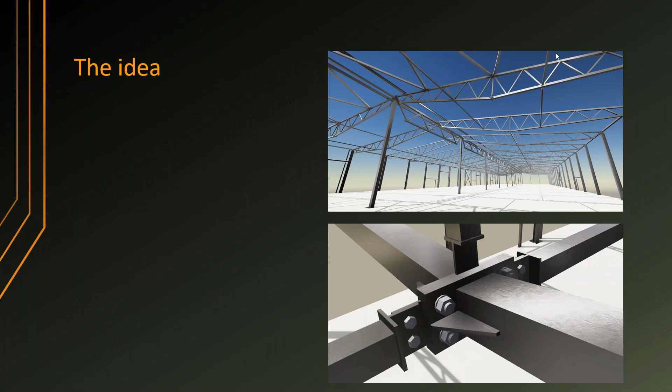Last year, I joined my university. I finished, and now I'm a guest lecturer giving lectures about BIM. And so, today's topic.

Today I'll share some experience we are developing for automated frame building. The idea is pretty simple: to type some building dimensions into a kind of tool, do some optimizations within its limits, and give out a ready 3D model, ready for manufacturing. So this is a simple idea of what we would like to achieve and what we are working for.

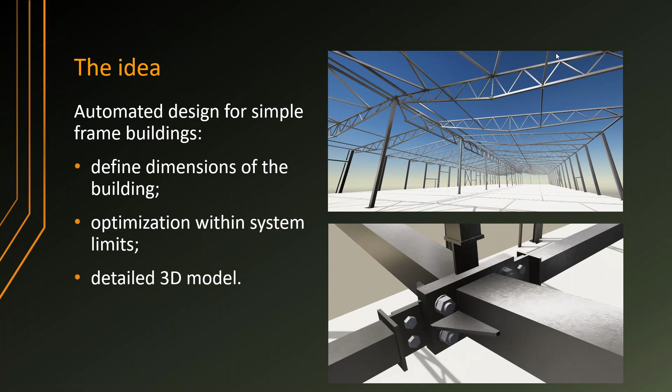In the next couple of slides, I will show some concepts of how we are developing this idea. As long as there is no widely available technology for creating freeform structures like with 3D printers—they are emerging and developing, but at this point they are just a new technology, not so widely adopted in real projects—so we are looking at a traditional way of constructing buildings.

So basically, we choose the structural frame for the building. We do some calculations. We choose profiles and types of connections.

As I mentioned, I worked in an international company, working on different kinds of projects in different countries. At that time, I noticed that each of these countries has its own traditions for how to deal with the structure, how to choose the materials, and so on. For example, in Scandinavia, they're more into prefab structures, and in Southern Europe, they're more into custom site work or brick laying. So there are lots of choices and possibilities to make these buildings.

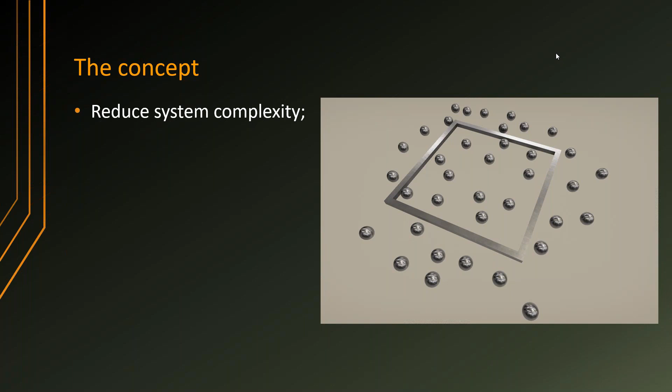So our first approach was to reduce the system complexity, so we would be able to parameterize this building. The next concept we are developing, as we call it, is the main infrastructure for the whole idea. It's a Grasshopper definition.

As you can see, there's an example. With this code, we can create columns, roof trusses, vertical braces, roof braces, internal walls, slabs, and everything else, including foundations. This code is organized by dividing it by its purpose.

You can see the gray line is input data. The orange line is the main code generating the building itself. The blue line is code for generating the 3D model in Tekla Structures, and the purple one is for generating the structural schema or frame for structural calculations.

In such a way, we can easily organize and easily maintain this code. It's like reading from left to right, and we can put other functions in between. It's quite easy, and that's the way we built this up through several trials, and found that this is the best way.

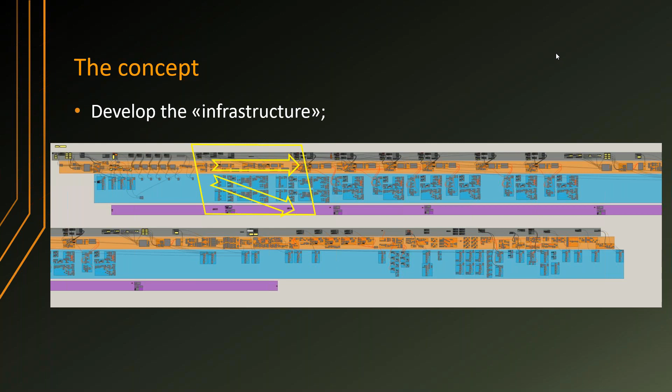The next topic I'd like to mention is the compatibility and sustainability of the code, of the idea itself. As you know, there are so many digital tools and solutions nowadays on the market, and it's difficult to choose one or a couple.

You can never guess if the new tool you choose will still be on the market next year or in a couple of months. My belief is that every time we have a problem and make a decision for one tool or another to solve it, we're actually causing a new problem that should be solved. We're kind of stuck in a never-ending problem-solution loop. So every new tool or solution may create other issues that must also be solved.

Of course, software versions are upgrading, and you must be sure they are compatible with each other. Our approach for this project is to try to use in Grasshopper just built-in code blocks, trying to avoid any third-party code blocks. In that way, we're trying to make it easier to maintain over time.

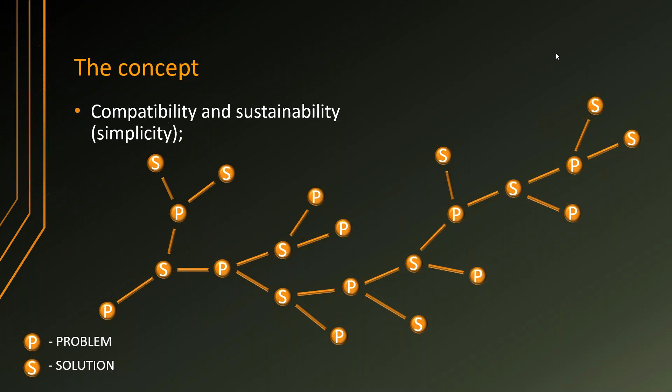Next, about the structural designs - we are looking for the best solutions. At this point we've tested several approaches, and we've come to the conclusion that it should probably be done within Grasshopper, or tested with the RFEM software that we use in everyday work.

This workflow showed that this kind of process does not suit our needs. We're looking for a workflow where structural frames are generated and a calculation engine can process them all and give the best one. With this software combination, we can only generate one by one, and every time we generate a new schema, the previous one gets deleted, so some manual tasks have to be done.

At this point, we're also looking at the possibility of using solutions like Karamba 3D or something similar, which would allow us to test many more variations of the building and find the best one.

There's another issue some of you have probably noticed - structural engineers are basically code oriented, and there needs to be trust built up in the tool they're using. It's not easy to convince them to use a new tool that hasn't already been proven in a real project. So this is another issue we're dealing with - getting structural engineers into these new solutions.

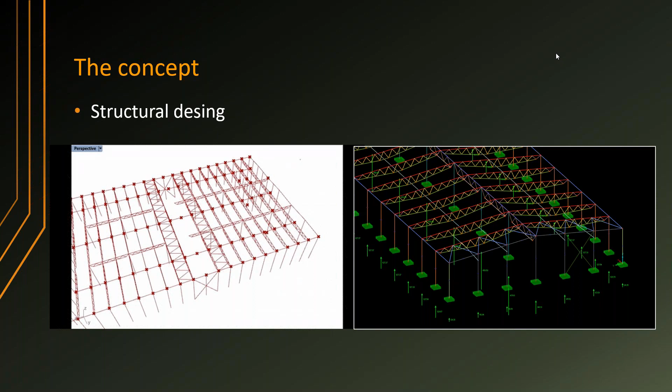The next concept we're dealing with to get this idea done is optimization, which is very closely connected to the structural design itself. The task is to find the best frame with reasonable load distribution and less material usage.

There's a paradox we can talk about here. If we tend to reduce the weight, it means we use the most suitable profile for the specific load. Basically, in that way we are increasing the complexity of the building system - there will be many different profiles and joints to save material.

The question is, do we save something at the end? I'm not quite sure at this point, because the producer will have to buy all these different profiles. There probably will be some leftovers in stock, so the prices will go up. The same goes for a builder. They will have to deal with a higher variety of structures and solutions, so it will take more time to assemble, which could also increase the price.

There's another approach: if you try to group all these profiles, we'll have less variation, fewer different profiles, but at the same time we will increase the material amounts.

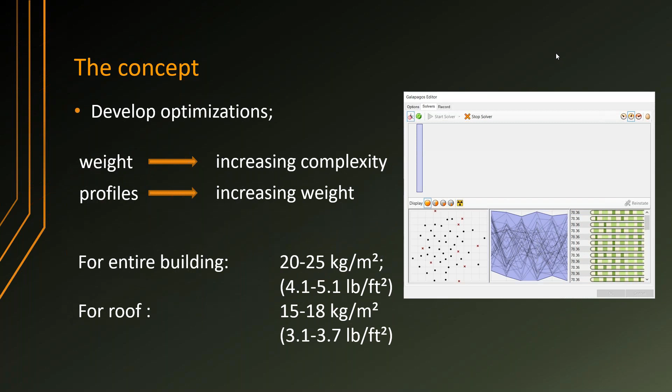The next part is about the 3D model itself. Basically, once we have all these frames ready, calculated and optimized, we need to make this 3D model. Grasshopper code allows us to connect to many other software packages to create this 3D model — it could be ArchiCAD, Revit, Tekla Structures, or Rhino itself. There are probably many others, of course, but at our company we decided on Tekla.

We've been working with this software for a while, and in our view it's quite suitable for high-level detailing. You can see examples made in Tekla, but there's no big problem connecting to other software. Solutions are available, and with higher usage of IFC file formats, it's probably even possible to do this directly in IFC.

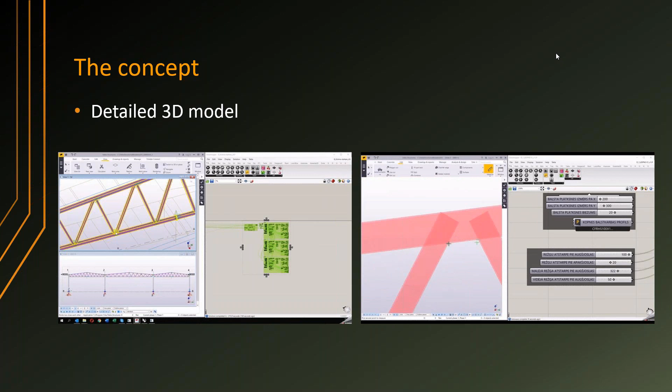That's the modeling code. As I showed before, this blue part looks quite big, but it's actually relatively easy to set up compared to the main code, because we've already got all the lines, geometry, profiles and so on. So we just have to connect to this modeling software and realize what's already done by the basic code.

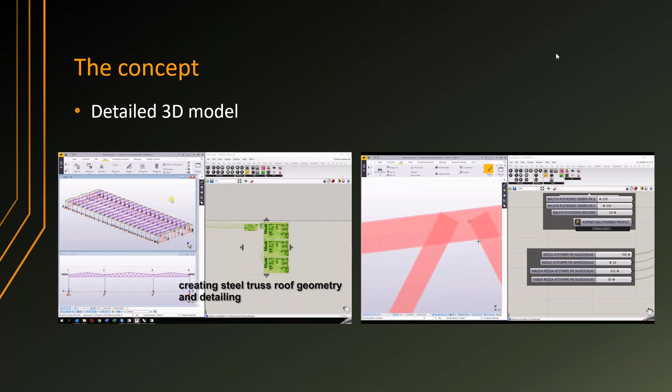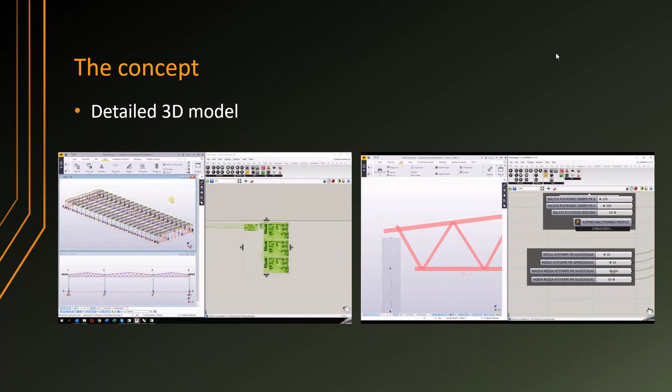The benefit of this is we can relatively quickly get all the materials and make decisions for the next stage of the project. We can easily change everything and see the results again.

So these were the main concepts. First, we reduce the complexity of the system to be able to parameterize it. We keep in mind the possibility of increasing complexity over time, adding other solutions, materials and so on. But we start with just a simple one, and the structural design should be able to do calculations for all possible variations based on the Grasshopper-generated frames.

The code itself should be readable and easy to maintain over time. It should be as open as possible for users to adjust it for specific project needs. As long as there's no widely available technology for creating freeform structures, optimization must include many more factors, such as available profiles, materials, manufacturing and construction technologies, and so on.

And at last we need to think about this 3D model — what format is needed, how do we create it, and where will it be used. So these are the concepts we are working on to get our idea done, and there are some examples.

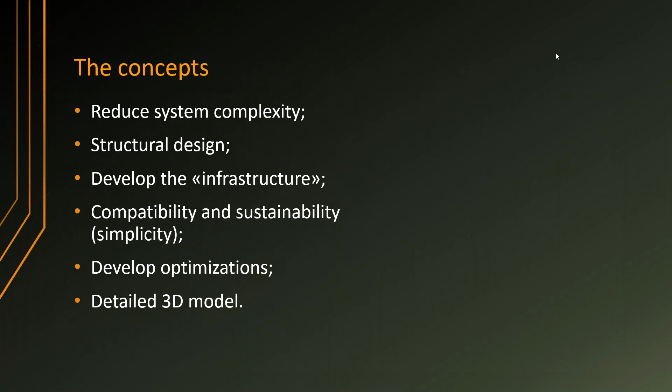It takes some time to generate all the geometry. It's pretty complex, but this code helped us to reach the limits of the software, and that was one of the tasks we wanted to achieve.

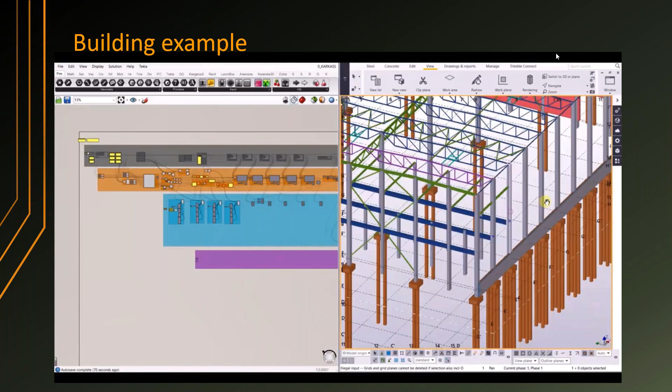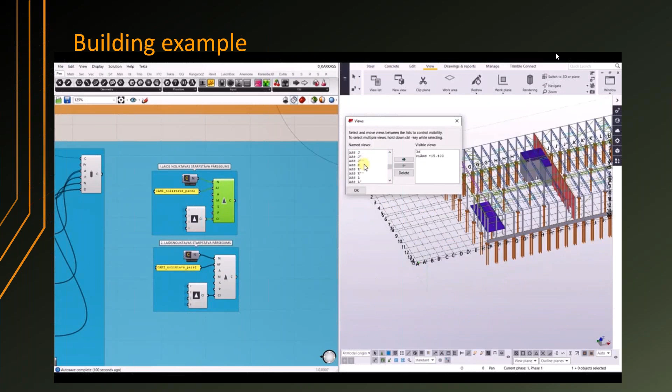But doing such big code in the project, this was a real project, we found issues with the live link. At some stage it broke down, so every session we knew we had to delete all the building and regenerate from the code again.

It's improved by Tekla now, and there's no issue anymore. You could see in the video in some place there were these blue slabs generated manually, so this was basically another issue we faced.

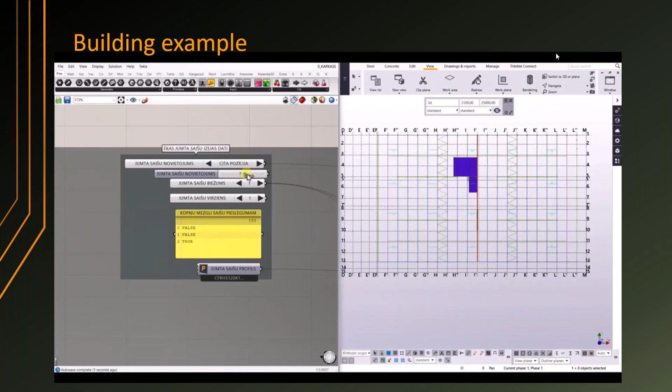Normally users in Tekla use components one by one, but using this code we were able to run all of them at the same time. We found that Tekla was not able to deal with them all at once, so those components should be executed one by one to make sure they're correctly displayed in the model. This was also improved.

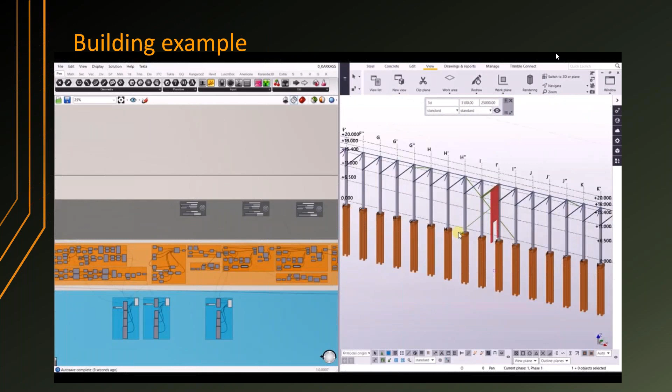So this was a great experience, and we can move forward. There is much more flexibility to the system now, and we can achieve more.

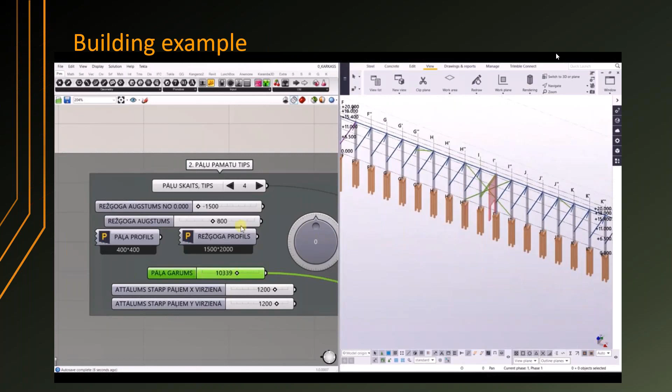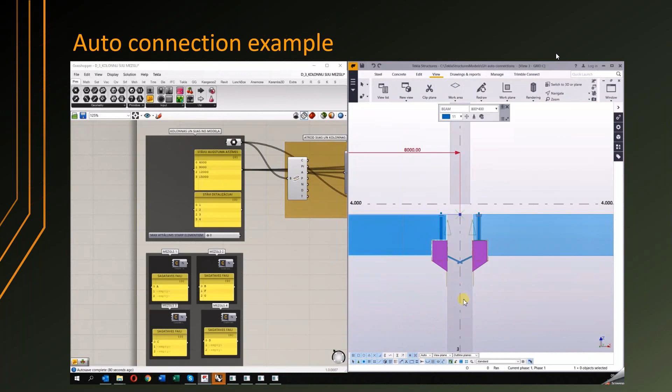Of course, there were also some Grasshopper improvements we could do with this project, and here is another example: auto connections we have developed. Basically, the code finds which elements in the model are connected, and it can divide them by the floors. In this case we have removed these connection points.

We can set up in the code the distance that will be taken into account. As you can see here, the points are connected, so a joint is generated. And if we say the allowable distance between elements is 300, the connection is also generated there. So it's quite a useful solution to automate all the joints between the structural elements.

And it's very good for prefab structures.

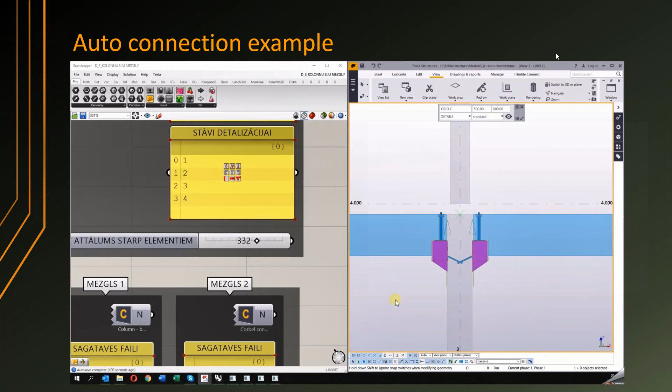That's all from my side at the moment. Thank you for your time, and I hope you got some new insights and my experience was useful. Thank you.

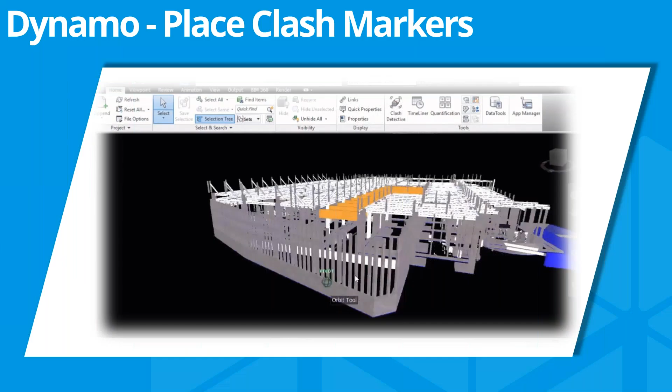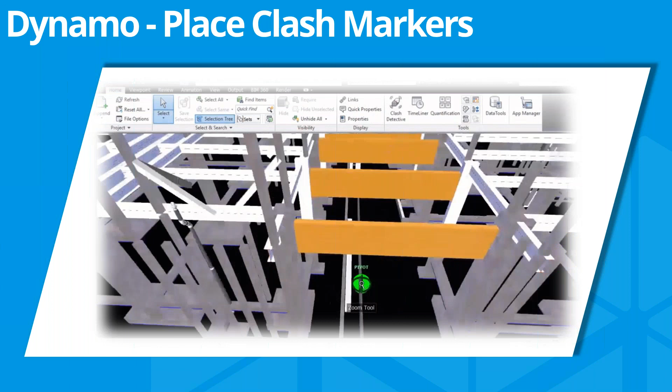We all know the clash coordination workflow where you do a clash inside Navisworks and then export that out to Revit via Dynamo and Excel. It's a pretty common workflow, so I'm not going to dig into it here, since a lot of other people have documented it. But just some highlights: we're going from Revit to Navisworks back to Revit, we got the XML report, the Excel file is necessary, and the biggest thing about this workflow is really lining up your coordinate systems correctly. But we're going to avoid that.

Let's look first at the Navisworks views. I believe view templates can be your best asset in a project. So the first thing we can do is set up all of these Navisworks views if we have appropriate view templates, all set up with a little bit of Dynamo code.

All we're doing here is getting all the views, then removing the null values - this is like 3D views that come in as null. We're then getting the ones that are templates, and looking for the ones that say Navisworks on it. Since it's a 3D view, we'll make a view for each Navisworks view template, and these templates could be different system types or however your office sets it up.

We can also export all these views once they're created to Navisworks files pretty quickly, thanks to Data-Shapes - we'll be using his work a lot in this workflow. Relatively easy: get your Navisworks views, give it a file path, get the current document, and make a file name from the document, actually adding the current date to it, so you always know which one's the newest export.

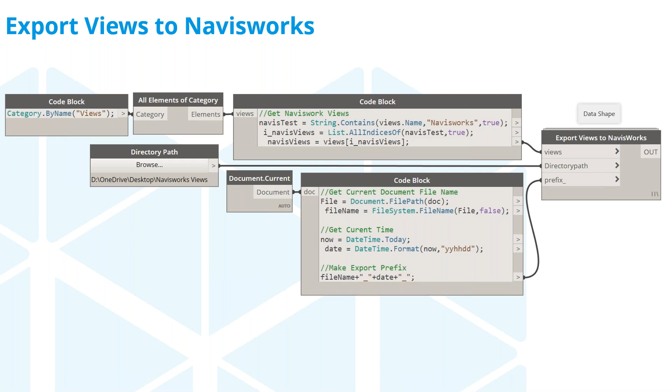I thought it'd be fun to look at another way of doing clashes - this is actually doing clash detection inside of Revit with Dynamo. Oh well, sorry, this one's actually the workflow for going from Excel.

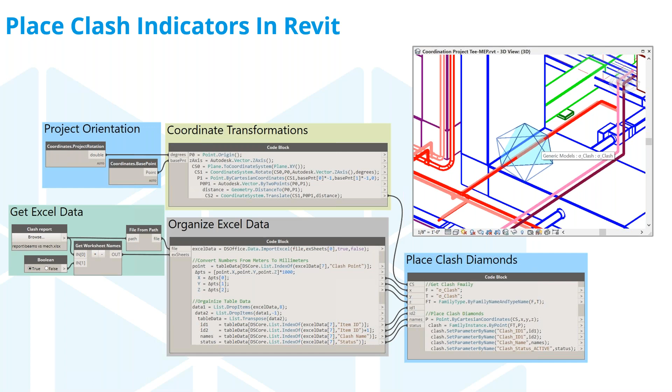You can see we have Excel data coming in, and we're then organizing that Excel data. On the top you can see we're pulling coordinates from our project, then translating the coordinate system, and we're able to place our clashes and set the parameters. But here I want to look at a workflow where we could do this all straight out of Dynamo.

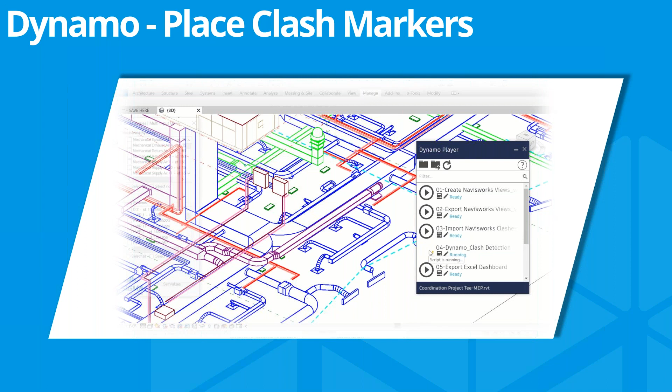This is really awesome if you don't have a huge model, but it works actually on the active view, so you can limit it down. Let's say you just modeled an area and you want to know if there's clashes - you could run this really quick, a lot faster than having to go all the way into Navisworks, set up your views, and do the Navis export out. So it's a much faster way.

What we're doing here is actually grabbing the Revit elements - so the elements are our clash family. And then also... oh yeah, we grab all the systems from the active view. So with the systems, we're then able to have that UI pop up so we can select certain systems. I found that's a really good way to get just the Revit elements that you're looking for.

We then use a node out of MEPover's package - he has ones where you can get all the elements from a system. We then need to filter these elements a little bit, but then the real magic of the script is a node inside Bimorph, which lets you do clash detection really, really fast compared to doing intersections in the native Revit way.

Now what's really interesting about this, I think, is how much data you can start collecting once you've done the clashes. So I really wanted to see how much data I could collect just from the information I had, and then what I could do with that information.

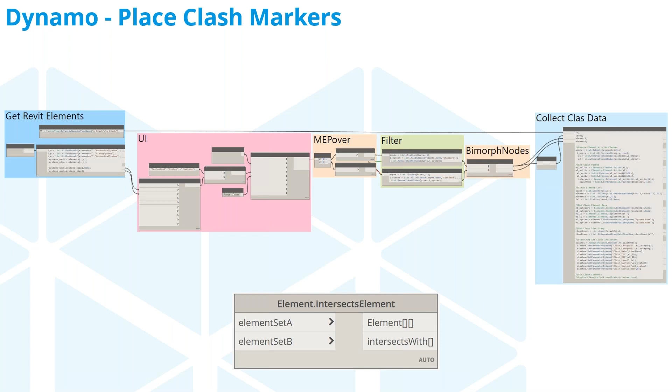So here's just some examples. Of course we can get the element of the clashes, the two elements, and the system types of the two elements of the clashes. But we can also, from the points, start to hone in on stuff like the level that this clash belongs to, the scope box that this clash belongs to. And then we can even think a little bit more outside the box about maybe the volume, so we can look at how big the intersection is of the clash and start to limit down which ones are bigger issues or which ones are just barely nicking, maybe because of some insulation, and it's not a big deal.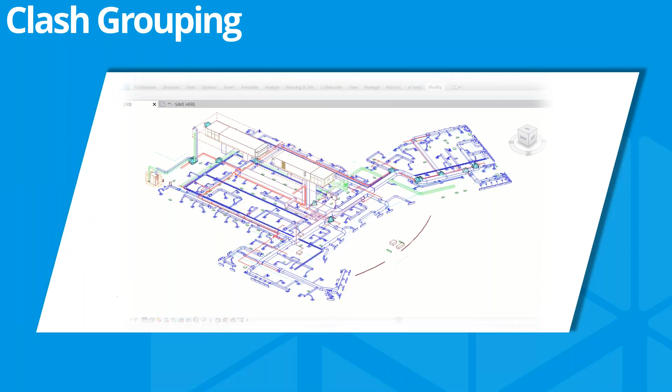Then also, how can we start grouping and ranking all these clashes is a really interesting thing. So clash grouping - this is our model. If we strip it all away, you can see that. But then, how can we start to group these clashes to be able to organize and go through it in a thoughtful kind of manner?

So there's a couple different ways to do it. One of them is a fun thing that I've used quite often since learning it, and that is k-means clustering. This is just a fun example of k-means where we're using a VAV box to cluster these groups of air terminals. You can kind of see how the VAV boxes move through multiple iterations to find these clusters. So you can think about using k-means to find massive groups of clashes inside your project.

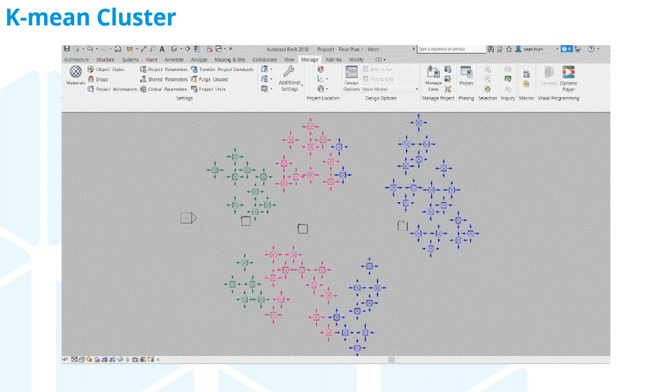Another method we've used is just grouping stuff by distance. There's a nice little Python node in there where we can look at the distance between the clash indicators, or spheres, or whatever object you use. And then you can put a margin on there. So if it's less than 5, in this case, you can see that all 3 of those blocks are grouped together. If it's greater than 5, you can see that they're not grouped together. But this could be run on all the clashes, and you could start to very quickly group clashes that even overlap each other to get a better understanding of where there's a lot of clashes and how to attack the problem.

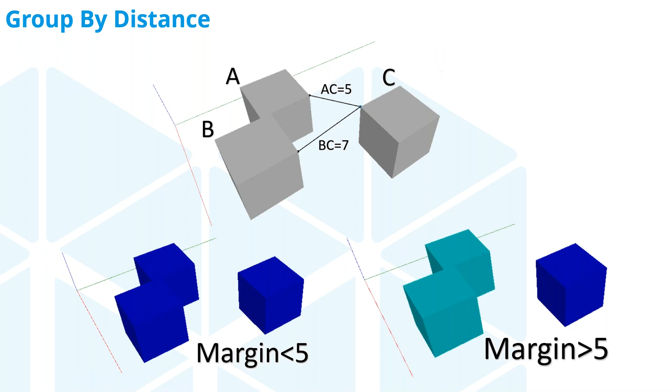So this is something that we've built. You could run all this out of Dynamo Player to even set different groupings. So here we have the option of setting groupings by scope box, setting groupings by using k-means, and even setting groupings using the group and the grids I put on there as well.

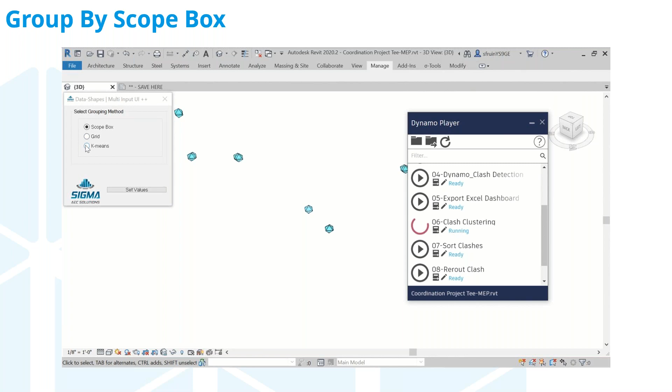So now we have all this data, right? I thought it'd be really interesting to get it all into Excel and see what we could do. So maybe you could have graphs of clashes solved versus new clashes created over time, to see if you're actually causing more problems than you're solving.

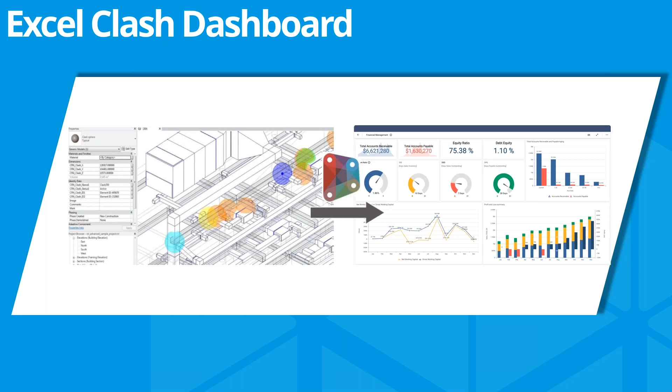I've also thought about maybe gamifying clash detection, where every time a clash is resolved, the Dynamo script is able to collect the person's name that solved that clash, and you can start to see how many clashes people are solving, somehow give a little reward system and get the whole team involved and make a competition. But also just being able to analyze the data with graphs and everything, I think is really useful.

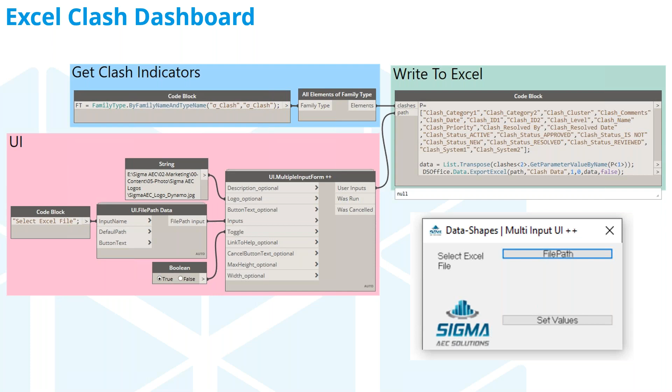So we're able to get all the clash data in Excel relatively easily. We simply have a UI pop up that says, hey, select a file path, please. And then we collect all the clash data within the project, and you can see we can write all those parameters that we've already set to Excel. So now we have this huge database to build these dashboards with in Excel, or Power BI, or whatever it might be.

The clash isolator - I didn't finish the video, but this one should be kind of straightforward. The whole idea here is that we have our clashes, we've now grouped them and ranked them with the data that we have, so now we want to start solving them.

So what we can do is we can go ahead and get the first clash in all of our clashes, and we can sort all of the clashes by their ranking. And then we can make a 3D view to isolate that clash, and we can even isolate the elements that aren't involved in the clash, or even halftone them. So this gives a really fast way to jump directly to where clashes are and be able to resolve clashes really quickly.

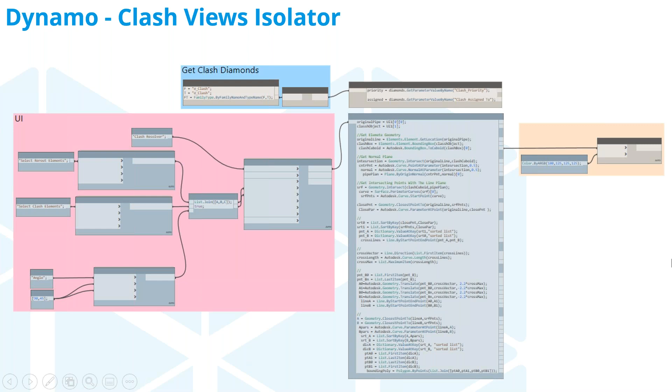The next tool, let's say you want a clash reroute, which is really difficult to model in 3D. This is a tool you could build to start to reroute clashes with Dynamo. You would go ahead, select the clashing elements and select the elements that you want to reroute.

There's a whole bunch of parameters there for flexibility. Do you want to go right or left? Do you want to go up and down?

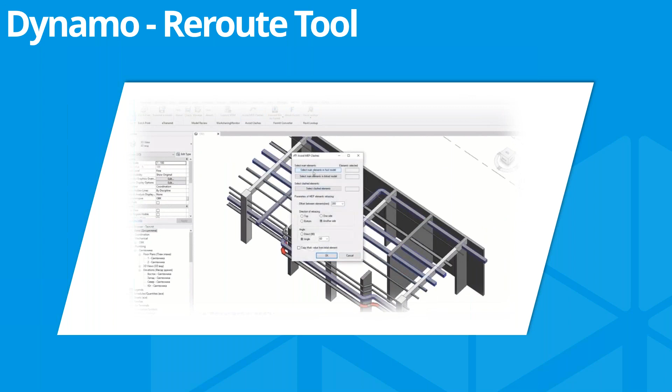How this tool is working is thanks to Topologic and their tools. It's built from this idea they put out where you have objects impeding a line, and it can automatically start to reroute around it.

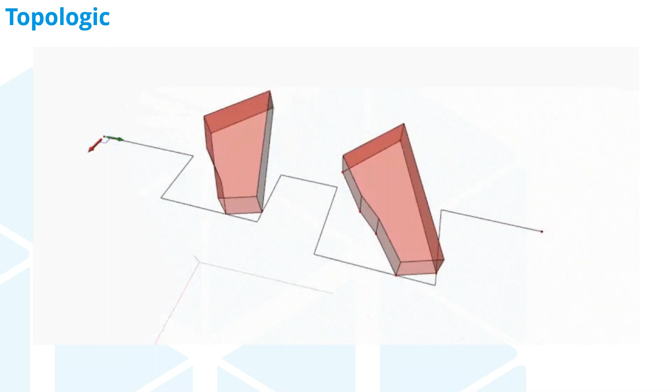So what you can do is isolate the view to only get the elements in that view, so you don't have tons of elements to check. Then you could go ahead and run this tool to find the best path around it and reroute. That's how it's working under the hood, with the Topologic Dynamo package.

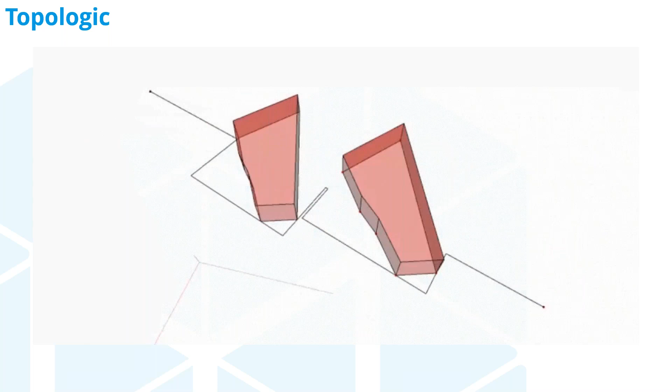So I really recommend you download that. It's a really good package, even for graph theory. I've been using a lot of fun stuff like that - shortest path, a whole bunch of stuff.

So this is the reroute tool. We have a UI pop-up that shows you all the options. Then we have to build the grid around the clash object.

This is actually kind of complicated because again, you have to deal with the coordinate system. So you want to make a bounding box, but aligned with the element that you're trying to reroute. From there, we can take that bounding box and build a lattice inside it.

We turn that lattice into a topological graph. And then from the topological graph, we can run the shortest path.

We then can collect all the system data and duct data from the old route, and then we'll delete the old route elements, whether it's ducts or pipes. And then with all the information, we can take that all back together - thanks again to the MEPover package - and build the new route around the element and connect it all back up.

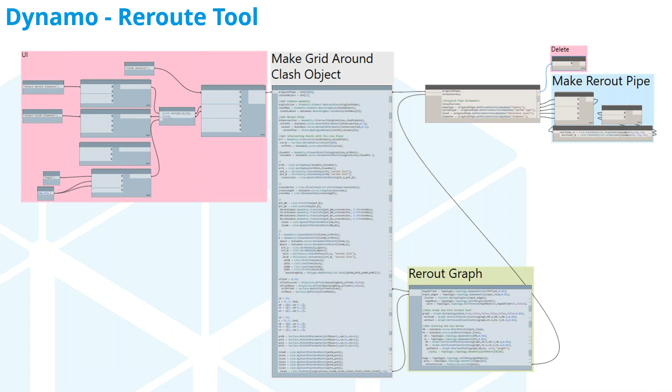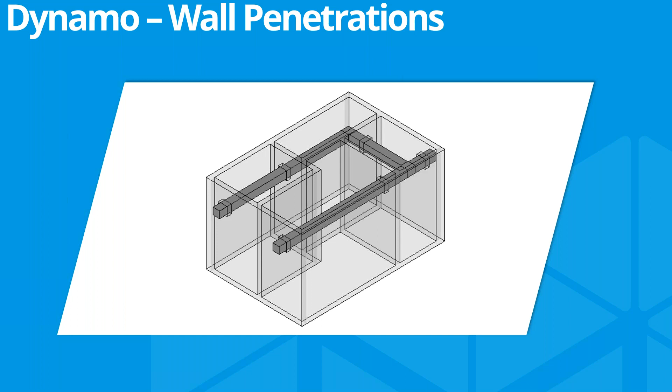The next idea is to really start to document wall penetration. So let's say you're going through your model and the next clash comes up on a wall penetration. Maybe using Dynamo player, you could click wall penetration, and we would do the wall penetration, and then we could also start to document it by building the section views at those particular walls.

We've also done stuff where we've added options, so I'm looking for CMU walls, or I'm looking for concrete walls. Then you could set that into your clash. And when those clashes pop up during clash detection, you would just run the Dynamo script for wall penetrations and wall documentation.

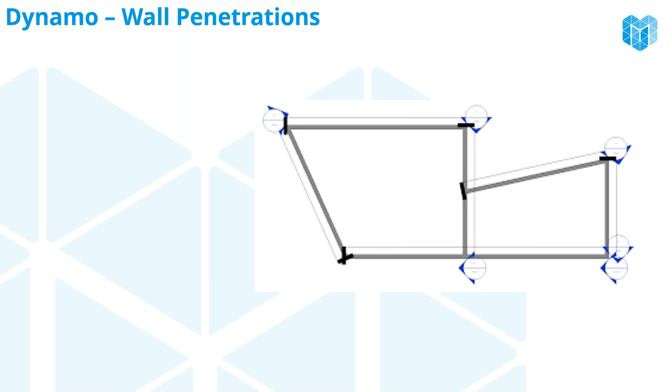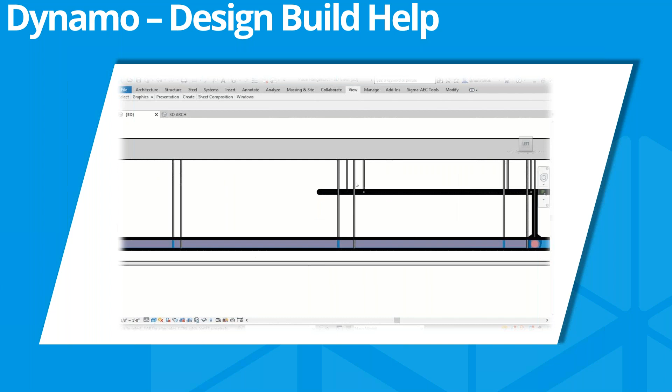So then let's say we've done all of our routing, we're good on clashes. There's more work to be done then on things like hangers to get to this design-build high level of modeling. This workflow works by finding pipes.

It really starts off with the Revit family. So here we have a Revit family - I put the center around the loop itself. I've seen it done different ways. The loop is parametric, so it can change, and then the height on the strap changes.

So what we're able to do then is collect all the Revit stuff - in this case, we're collecting all the pipes. We then want to filter out those undesired pipes, which might definitely include vertical pipes. So we can look at a parameter to get those and then remove them.

And maybe you want to even get angled pipes too, so you could get the line geometry of the pipes and check if the Z vector is 0. If it's not 0, then we'll remove them. From there we get the element geometry, so we have the start and endpoints of the element geometry, which is just a line for a pipe.

We're able to get points cut in at a little bit, whichever designated offset you want to go in, and that can be set in the user UI. Then we can get the points along that line at a certain distance.

Get those parameters, so now we have points along the line. Then we can use the vector information from the line, the direction of the pipeline, to figure out the rotation. A cross product of the Z vector and the line itself will give you the Y vector, which you can use to interpolate the actual rotation for the hanger itself.

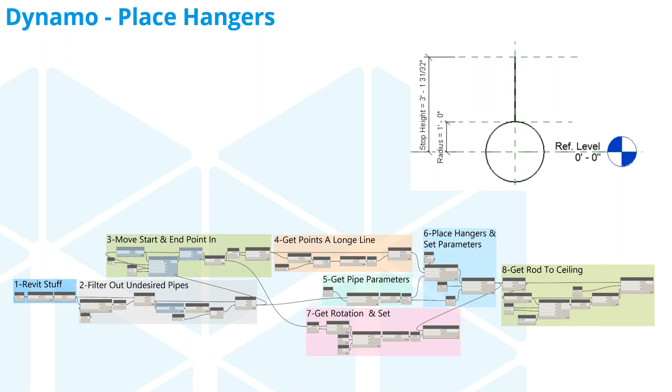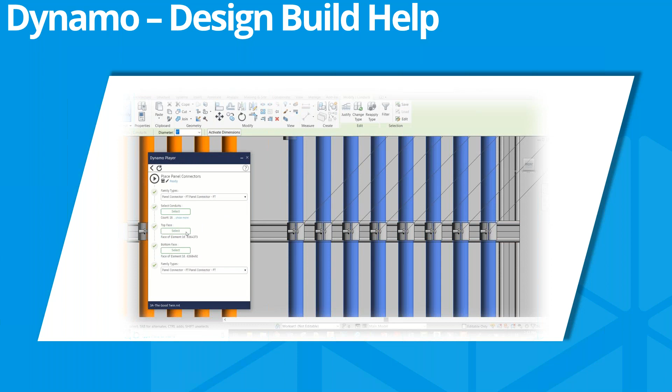We could also do stuff with modeling really detailed level of stuff. So here we're actually just selecting Unistrut to be able to place all those Unistrut straps, and then also the connectors to the panels and the Unistrut. In this project, we're actually modeling down to the bolts, washers, and straps to be able to do auto documentation and bill of materials from those individual elements without doing assemblies, since assemblies tend to blow up a model really high.

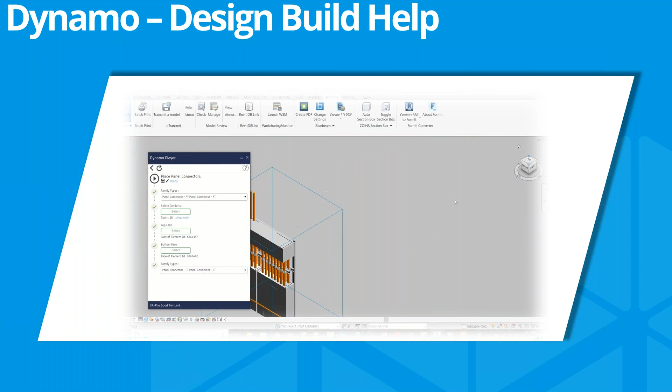But rather than doing this, we took the human plus computer approach, where the human could go in and select this to place those a lot faster than trying to model to this level of detail by hand. I mean, that would be an absolute nightmare.

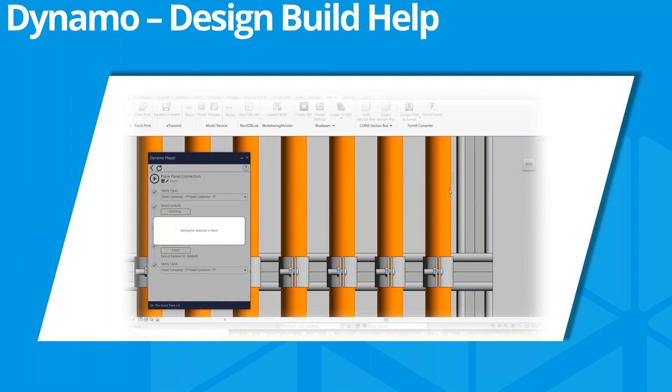So the next step for the fabrication process is this idea to make all the views. Here we're able to select one element just to show how this would work. What I like to do is define a 3D view, and then I can make the camera be really whatever I want with really simple controls.

So here we have them all on sliders. We brought in a duct and we have everything on a slider. You can see that phi is that rotation over the top axis, and theta is the rotation in the XY plane.

But we could also feed in different degrees: 0 degrees to get the front, 90 degrees to get the side, 180 degrees to get the back, 270 to get the other side, and similarly for the top. You can even get your ISO view by a combination of phi and theta.

You're then able to send that to a 3D view, though I didn't have it already documented. When you lock the 3D view, you're able to start doing dimensioning. You can have Dynamo do the dimensioning on the top view to get the length, use the front view for the dimensioning of the size of the duct, or even just tag the ISO view to get information about the duct, and then put all that on a sheet for your shop drawings.

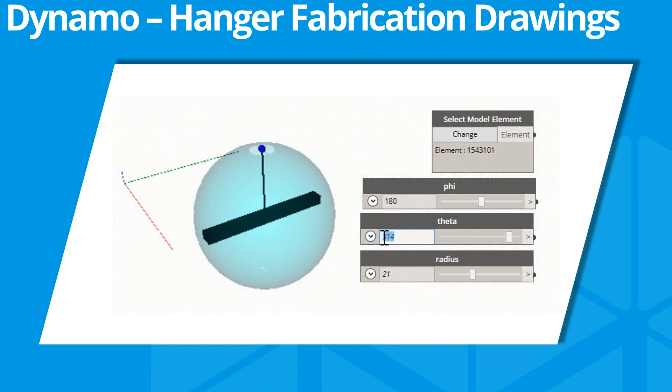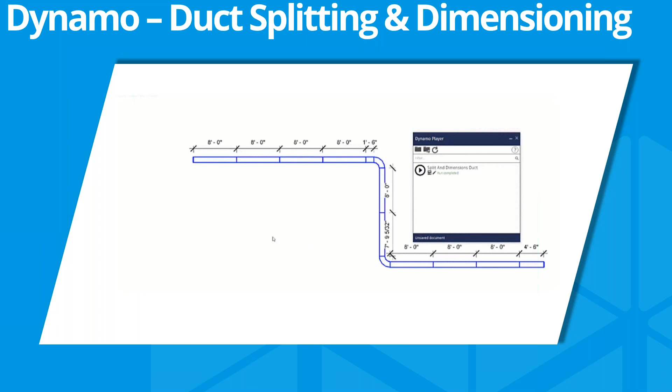Another aspect of this workflow is that if you have a whole bunch of ducts and you cut them at a standard length, we're then able to make one sheet for each duct that's the same size and length just by setting up the first one. We use the element IDs to organize this together, and you can also see that we can dimension stuff on an actual plan view to help get documentation out the door well.

That's all I have, so any questions, I guess?